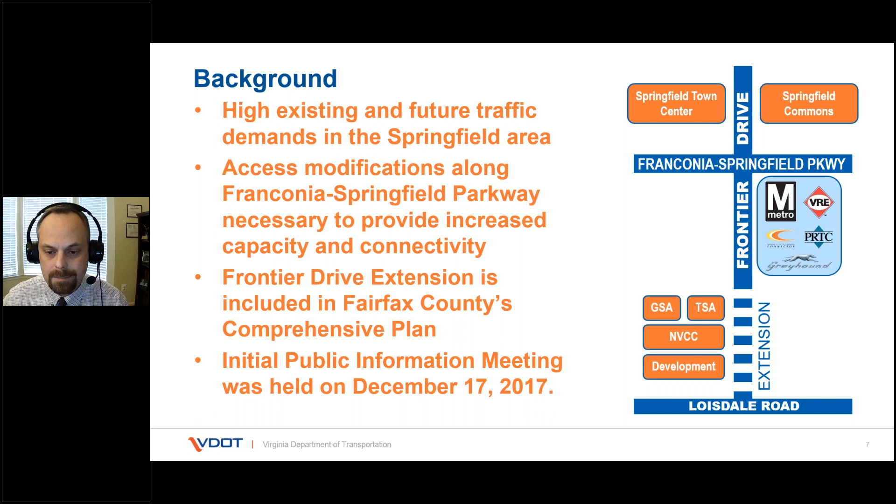We did have an initial public information meeting back in December of 2017, and since then there have been some changes to the design based on input from Fairfax County as well as WMATA, and we'll be discussing those changes in a moment. Next slide, please.

This next slide shows the project location and area in its entirety. This includes the extension to the south to Loisdale Road, the introduction of braided ramps to the north at the interchange with the Franconia-Springfield Parkway, and the circulation area around the metro station.

These proposed improvements are intended to enhance traffic operations and safety by providing increased capacity and greater connectivity, provide improved accessibility to the Franconia-Springfield Metro station and businesses located along Springfield Center Drive, and also improve pedestrian and bicycle facilities throughout the corridor, as well as reduce congestion levels on regional roadways.

Next, to talk about the specifics of the project, Robert Morris, our consultant project manager, is going to walk you through design. Robert?

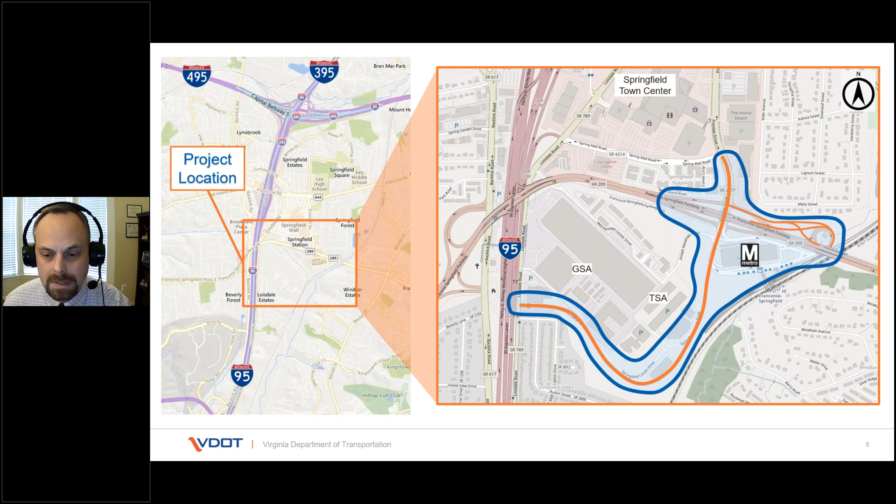Thanks, Andy. Next slide, please. As you've heard, there have been some changes that have occurred since our last public information meeting was held in December of 2017. There's been a great deal of coordination between VDOT, Fairfax County, WMATA, and adjacent property owners.

Let's briefly review the design features for this project, and I'll then highlight those areas where things have changed or been updated. In general, the project can be summarized by looking at three main areas of improvements.

These are the extension of Frontier Drive from the Franconia-Springfield Parkway interchange and the metro station across Long Branch up to Loisdale Road. Frontier Drive will replace Springfield Center Drive for the portion of the project that we call the South Project area.

We will be modifying the Franconia-Springfield Parkway interchange into a braided ramp configuration to provide operational and safety improvements, as well as access improvements at and around the metro station.

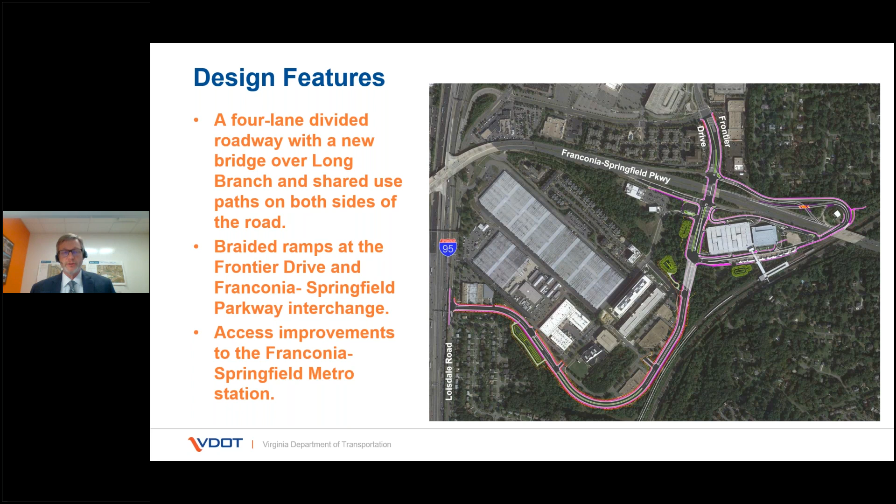Let's now focus on some specific areas of the project, and I'll highlight some of the changes since we last got together in 2017. Next slide, please.

This slide shows the typical section that was presented previously. It included on-road bike lanes, a sidewalk, shared use path, and an overall width of 106 feet.

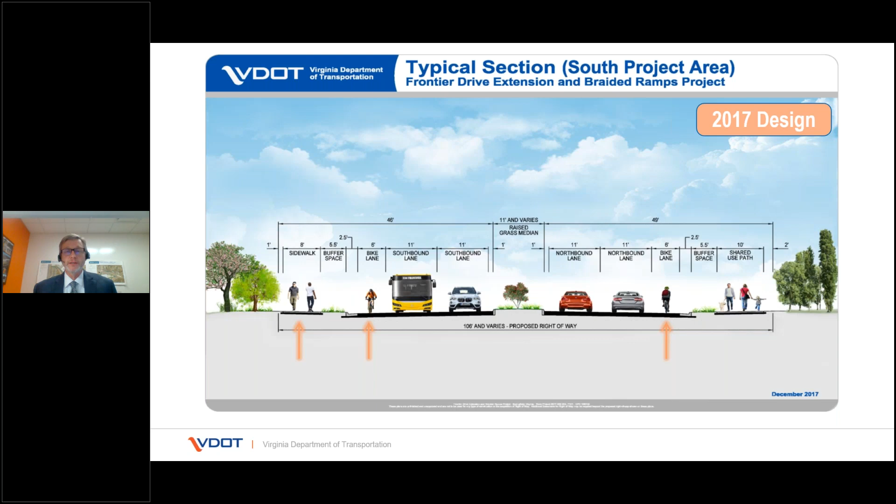This slide shows the current typical section. The overall width has been reduced to 98 feet. The on-road bike lanes have been removed, and Frontier Drive will now include a 10-foot shared use path on the southern side and a 10-foot concrete urban shared use path on the north side.

The on-road bike lanes were removed due to the complex interaction of vehicles and numerous traffic movements near the interchange and the metro station. For the purposes of consistency, the south section will not include on-road bike lanes either. Next slide.

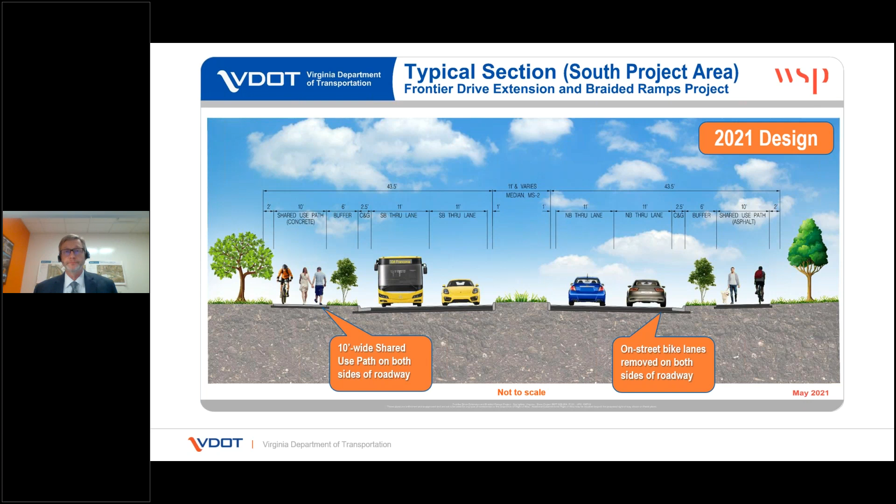This slide shows the North Project area, which includes the braided ramps, the metro station, and a portion of the Frontier Drive extension. The circles identify some of the more significant design features that have changed.

These include the typical section changes I mentioned, the intersection configuration at the entrance to the metro station, the configuration of the bus layover lot, and the proposed roundabout on the east end of the station. Next slide.

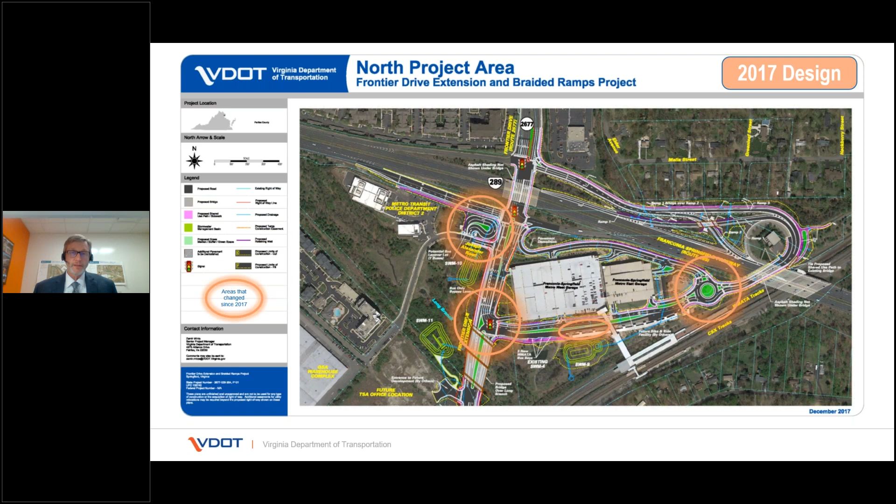As a result of continued coordination with WMATA and the completion of a value engineering study on the project in 2018, revisions were made to the 2017 concept and are shown on this slide.

As previously mentioned, the on-road bike lanes were removed due to the complex traffic movements in this area. The bus layover configuration has been revised to improve bus operations, both entering and exiting the lot. The intersection at the entrance to the metro station was modified to a jug handle configuration.

This will allow vehicles and buses coming from Franconia-Springfield Parkway that want to enter the metro station to stay to the right, which improves operations along Frontier Drive and eliminates the majority of the weaving movements that were present in the 2017 design.

And lastly, the roundabout planned on the east end in 2017 has been eliminated in favor of a signalized intersection. This change was a result of coordination with WMATA, considering the planned circulation at the station and future plans for facilities around this area.

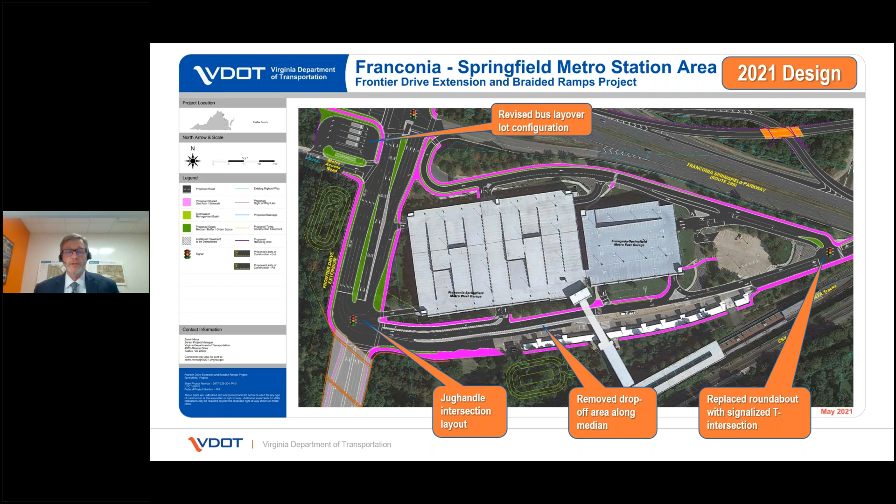Next slide, please. This slide just provides a zoomed in view of the area around the metro station, which includes the updated bus layover lot configuration, the jug handle intersection configuration, elimination of the roundabout, as well as some changes in circulation around the station. Next slide.

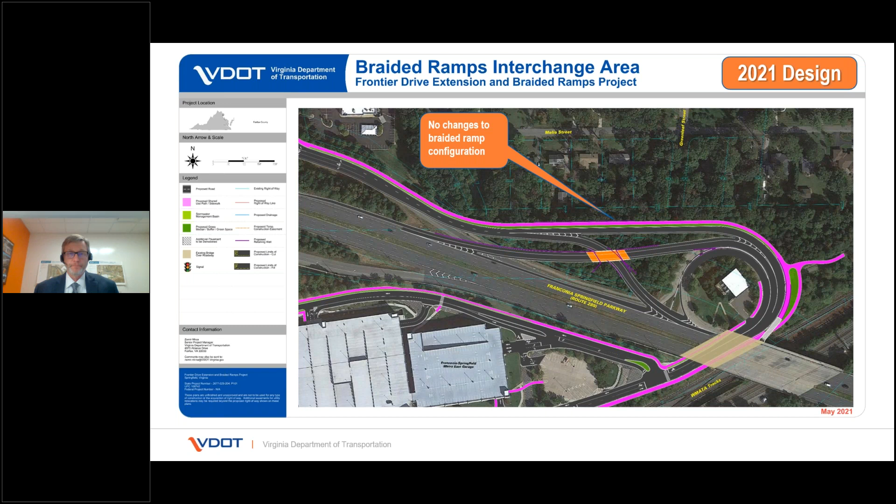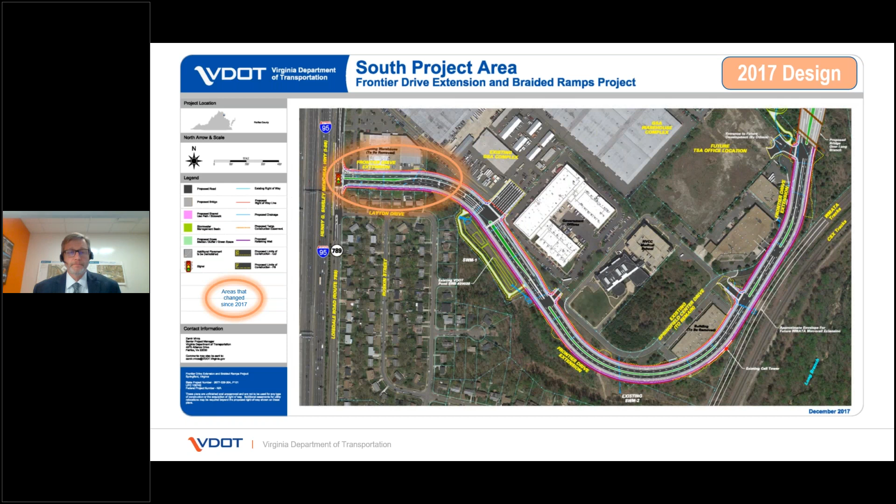For the updated 2021 design, the typical section revision reduced the footprint of Frontier Drive, in particular at the intersection with Loisdale Road. This made it possible to eliminate the impacts to the building on the corner of Frontier and Loisdale. Through the reduction of that typical section and a retrofit of the existing stormwater management ponds shown on the screen, the project was able to reduce the impact on adjacent parcels along Frontier Drive.

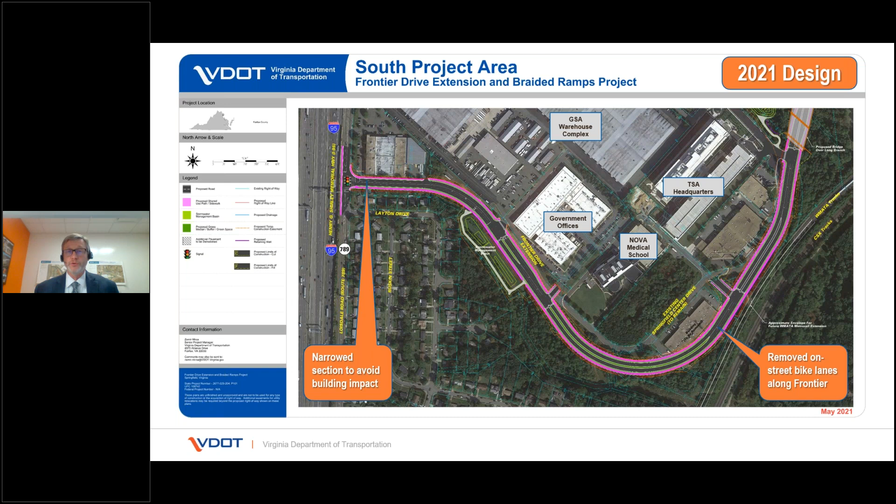You'll also see that access points along Frontier have been updated to provide access to the existing properties, as well as to adjust for the arrival of the future TSA headquarters.

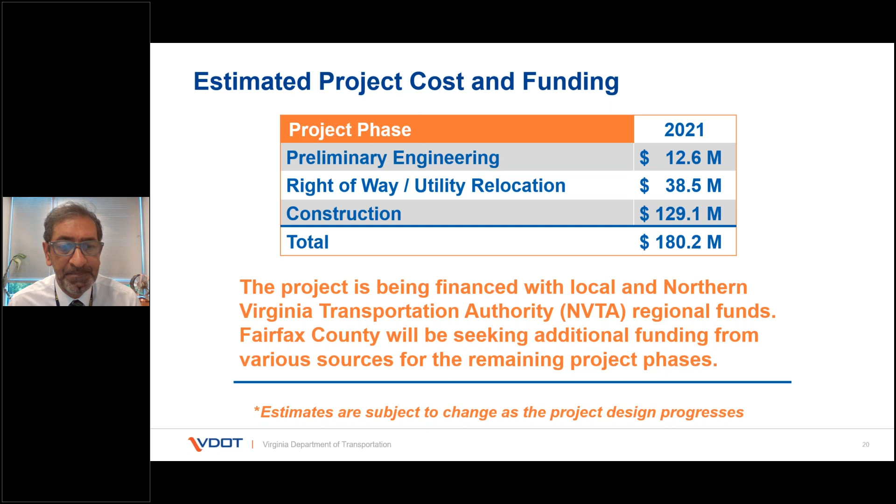With regards to funding, the project is being financed with local and Northern Virginia Transportation Authority, NVTA, regional funds. Fairfax County will be seeking additional funds from various sources for the remaining project phases.

Following that, we will seek endorsement from the county as well as design approval from the VDOT chief engineer, and we expect to have that by winter this year. After which, we'll begin work on the detailed design plans.

The next phase of the project will be the right-of-way and utility relocation stage. This is when we acquire the necessary rights-of-way for the affected property owners along the corridor, and also when we protect and, if necessary, relocate the utilities that are affected by the design. The process is usually quite lengthy and is expected to take several years.

So for now, we expect to begin construction by the summer of 2025. But again, that is subject to change. So as I mentioned, the next step is to develop the public hearing plans by the summer

and then hold a public hearing in the fall. But we will continue our coordination efforts with WMATA, Fairfax County, and the other affected project stakeholders. I should mention here that we may hold a joint public hearing with WMATA since they are required to hold a public involvement meeting themselves.

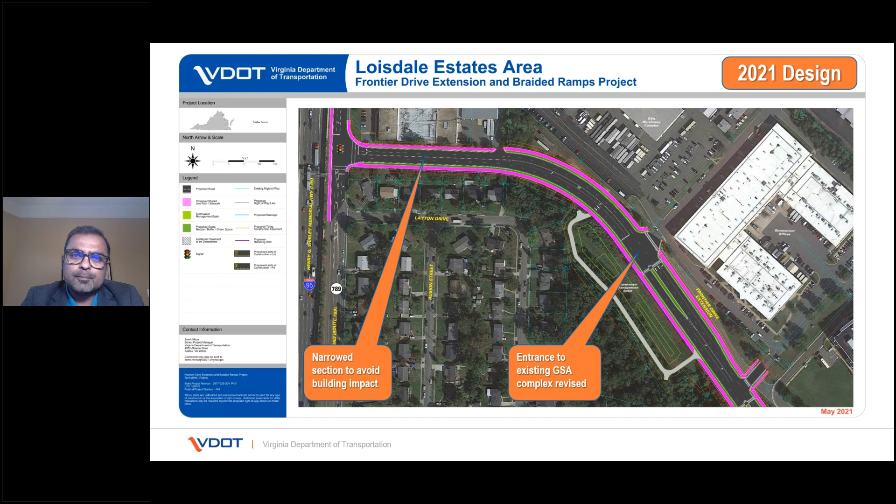Yeah, I think the signal at Loisdale has recently been rebuilt, and if you're familiar with that area, you might have noticed that. But once this project begins, we are upgrading that signal again to accommodate the design that we are proposing.

So what we do in the noise study analysis is place receptors at each outdoor use of a noise sensitive site, like a residential home. Once we do the noise study, if the noise levels exceed the noise impact criteria, that site is considered impacted, and we are required to evaluate a wall. Once the evaluation shows the wall provides at least 5 decibels of noise reduction to the impacted sites, we call that benefited.

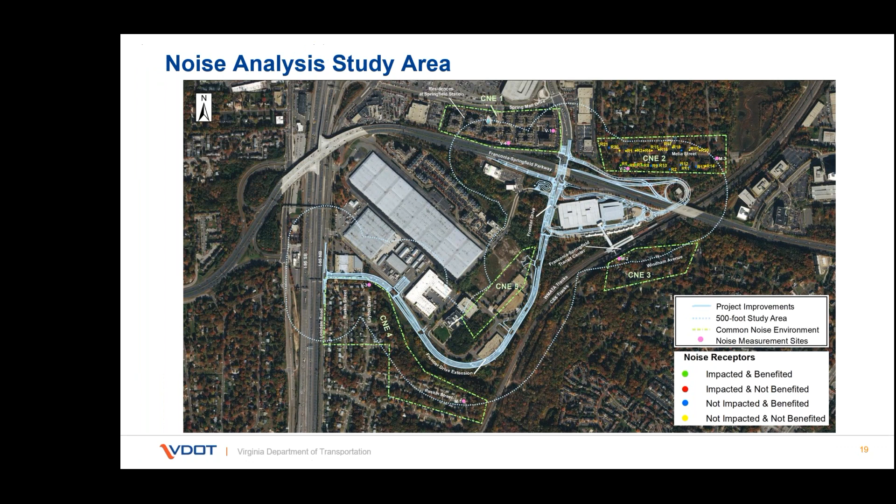Yeah, sure. So we have about 500 vehicles in the morning coming from the station side. Out of that, 450 vehicles will be turning right onto the TSA driveway, and the remaining 50 vehicles will continue towards Loisdale.

Even that traffic wouldn't necessarily go all the way to Loisdale, right? It could be going to the NOVA Medical School, or it could be going to the GSA facility, and there's other businesses down there, right?

That's correct. So overall at Loisdale, sorry, on Springfield Center Drive, the trips coming out of Springfield Center Drive going onto Loisdale, we are looking at 50 vehicles in 1 hour, which is the peak hour in the morning, and about 250 vehicles in the PM peak hour in the evening. We do have a separate left turn and right turn lane on Springfield Center Drive, so with the signal and these separate turn lanes, it should accommodate the projected amount of trips that we have analyzed.

All right, thank you, Harry. We have another one for you as well. This one is from Jim. Sorry, it looks like we skipped this question earlier, so I apologize for that. Reiterating this question that did not get answered: of the projected 6,000 to 7,000 estimate of cars per day on the extended road, how many of those cars are estimated to be going to Loisdale Road, and what proportion of that will be northbound?

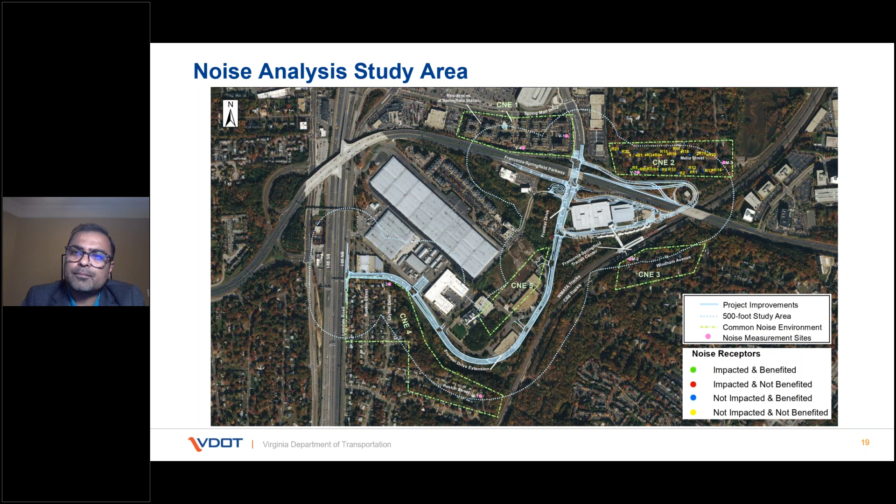Thank you, Harry. All right, so the next question we have is from Alexis. Are improvements planned for access to the path that starts at the southwest corner of Frontier Drive / Franconia-Springfield Parkway and is adjacent to the Metro Police property? Right now, there is no signage, no lighting, and the vegetation is always overgrown. The path's asphalt condition is very poor. It is not clear that a path is available there. It's a confusing and uncomfortable experience for people walking and biking.

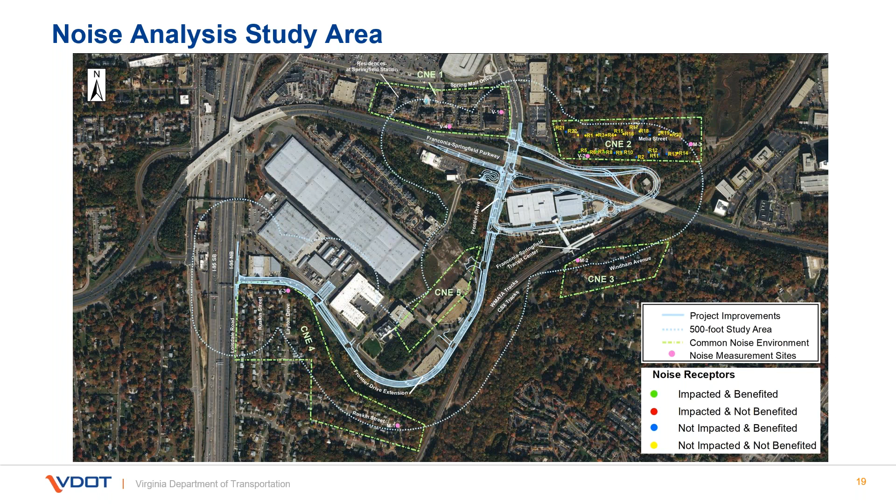If we could just go to that slide that shows the overflow parking lot, and Robert, maybe you can speak to what's going on there and how far away that Metro Police property is in relation to that, and show it on this plan. Maybe zoom in if you can.

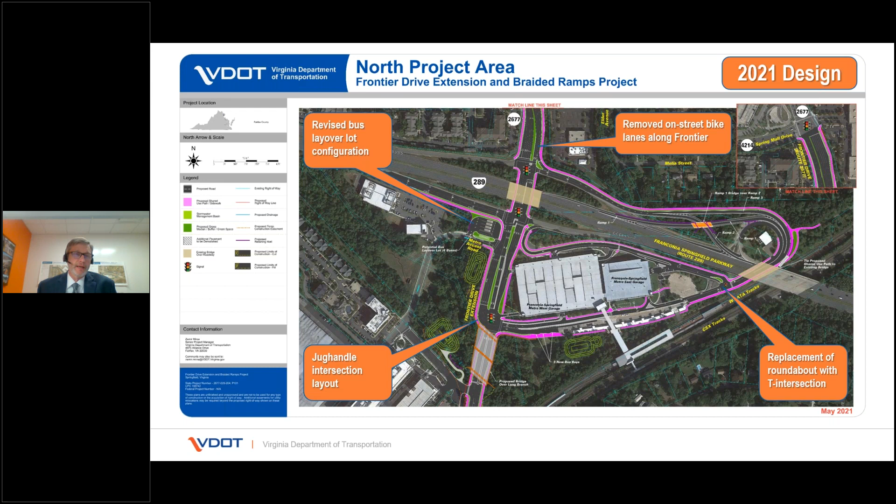Sure. Genevieve, did you say, just to make sure I got the path location correct, which part of the interchange? You said southwest part of the interchange? Yes, it says the path that starts at the southwest corner of Frontier Drive / Franconia-Springfield Parkway and is adjacent to the Metro Police property.

Okay. If you look on this screen, you'll see it's kind of a magenta color. They identify the new sidewalk or shared use path connections that we're going to be making as part of this project. As part of the work related to the off-ramp coming from Franconia-Springfield Parkway down to Frontier, you can see on the screen right now that we are showing connections from that path that you're referring to. So at least along the length of that ramp, we're going to be calling for replacing that asphalt path that runs between the ramp and the Metro Police Station. And as you can also see on the screen, there's lots of other connections that are going to be tying in, both to get over to the Metro Station as well as to head up Frontier Drive, heading north, heading up towards Springfield Town Center.

So a portion of it will be certainly improved, and there'll be a little bit of realignment of it. I don't know that it will extend quite as far as perhaps the question was asking, but certainly we're addressing it within the project limits.

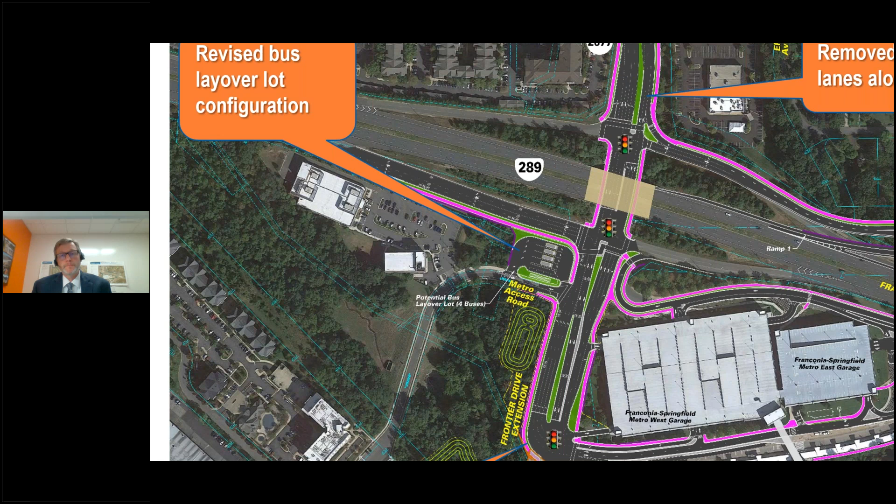All right, thank you. The next question is from Graham.

Much of the extension follows the existing Springfield Center Drive alignment with a few exceptions, such as the area of the undeveloped parcel adjacent to the NVCC building. Will those sections of that existing right-of-way be closed?

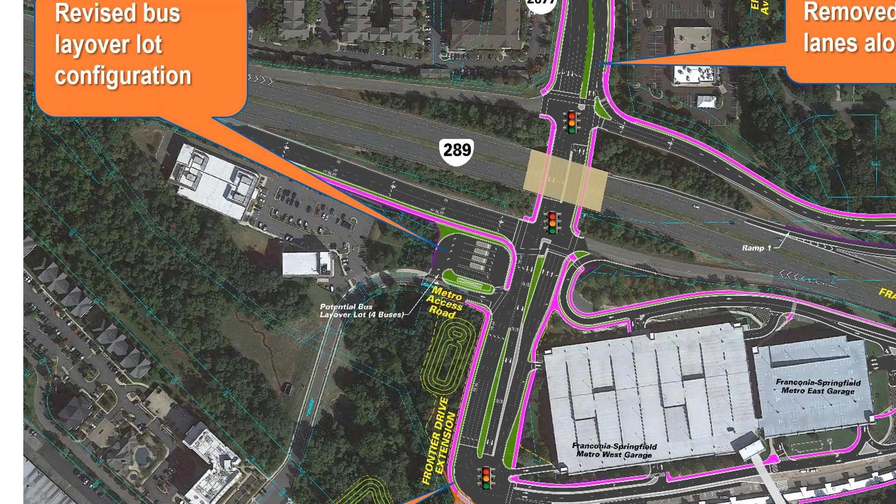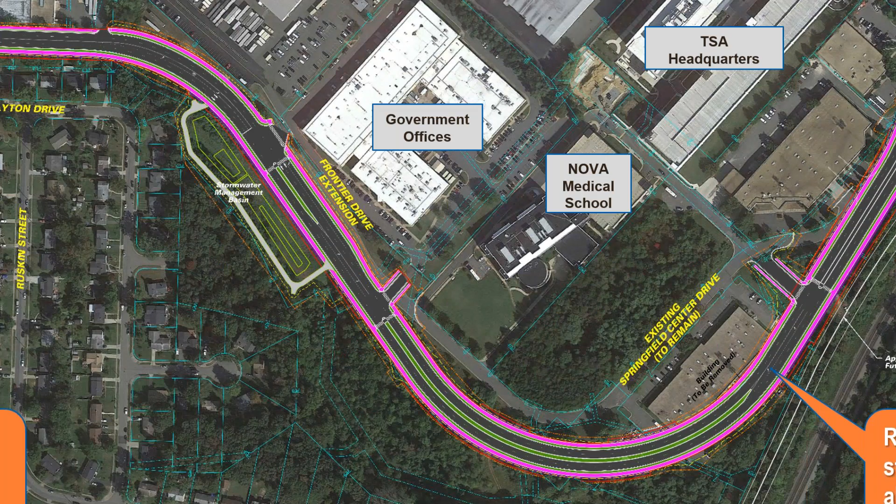So if we can just go to that slide that shows that location, maybe zoom in a little bit in that area, if you can, and where it turns. So that property being referred to is that sort of wooded parcel right next to the Nova Medical School.

And that is owned by Nova. I think it was mentioned earlier that there are plans to develop that by the Nova Medical School.

So, as you can see, we are providing access to the Nova Medical School as well as government offices adjacent to it. We are currently revisiting the access to this, and this is just a preliminary design showing the access point. There will be another access point further to the north that you can see. We are providing that access point as well.

The road actually does impact this property that is planned to be demolished, and we've already met with the property owner and come to an agreement over that building. Obviously, we haven't reached settlement on the compensation that will be paid, but they're aware that their building will be affected by the project.

So just beyond that, you'll see that we have provided access to both the Nova Medical School and the TSA headquarters through that access point.

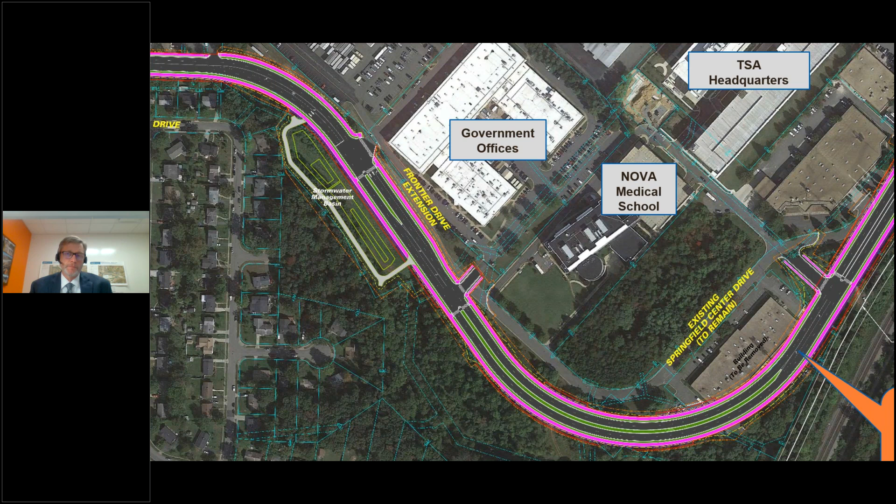All right, thank you both. Our next question is from Linda.

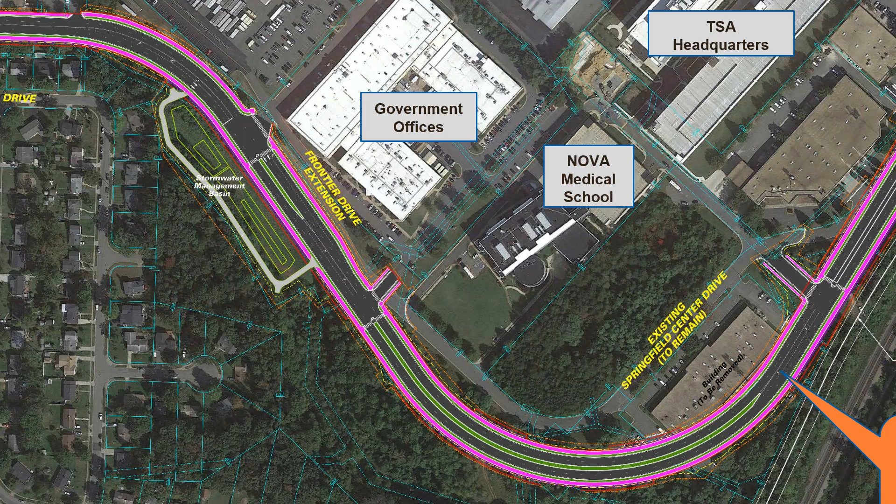Are we to understand that there will be no direct cut-through, vehicle or pedestrian, into or out of Springfield Forest? In parentheses it says Melia Street, Elder Avenue, and/or Hackberry Street. So I'm assuming this is referring to the area north of the proposed braided ramps, correct? It's sometimes difficult to follow that location.

Right, so whatever access points, Robert, I don't know if you know whether we're cutting off any access points. To my knowledge, what we are doing is enhancing some of the connections with our design to the existing trails at that location.

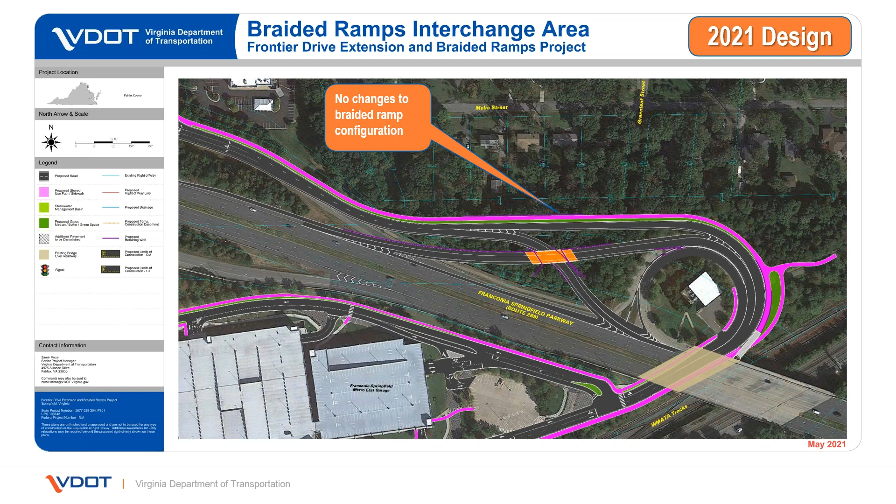As we look to the right of that slide, if you zoom in on there, that is where we are making a connection. I'm not aware of any other locations that we are impacting adversely.

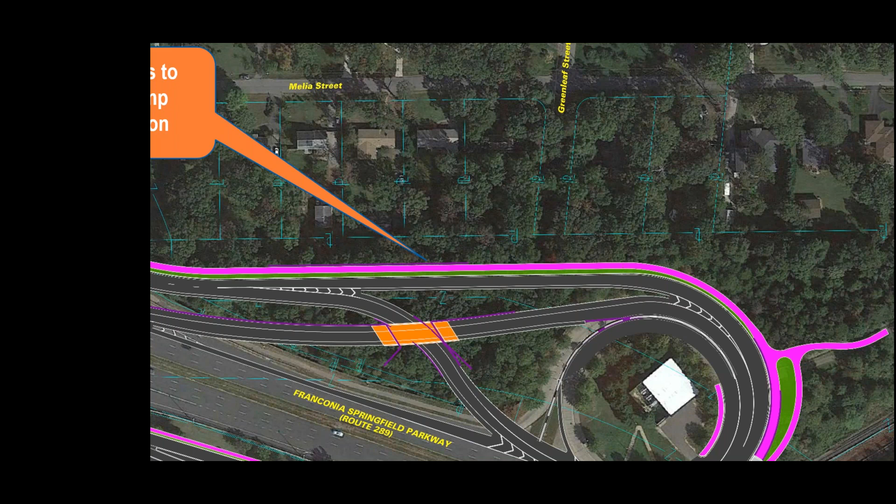Correct. Yeah, there is no vehicular access being made to Melia Street or that neighborhood up there from the braided ramps. There is, as you can see in the lower right corner of the screen, a connection to the existing trail down there, tying in to the shared use path that'll run along the braided ramps, but that would be it.

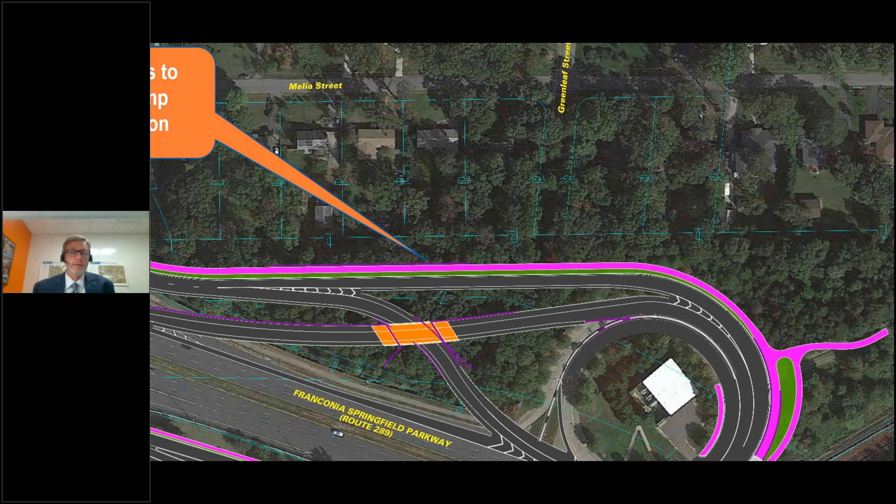And just to mention, this is where the wall will go in between the braided ramps and the properties at this location, if the wall is justified and warranted through the detailed noise study. Again, it's for everybody else's benefit as well.

Okay, thank you. Our next question is from Willie, and Willie asks: the Loisdale end of Springfield Center Drive is barely 3 lanes wide. Are you widening that?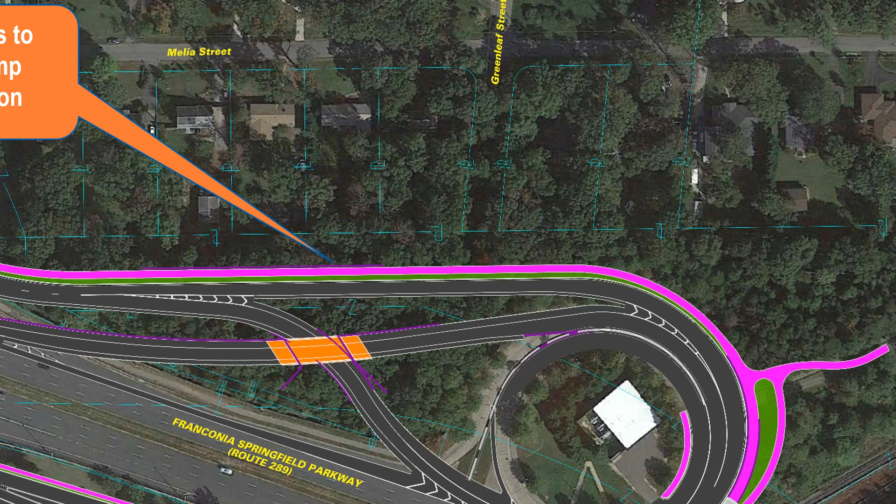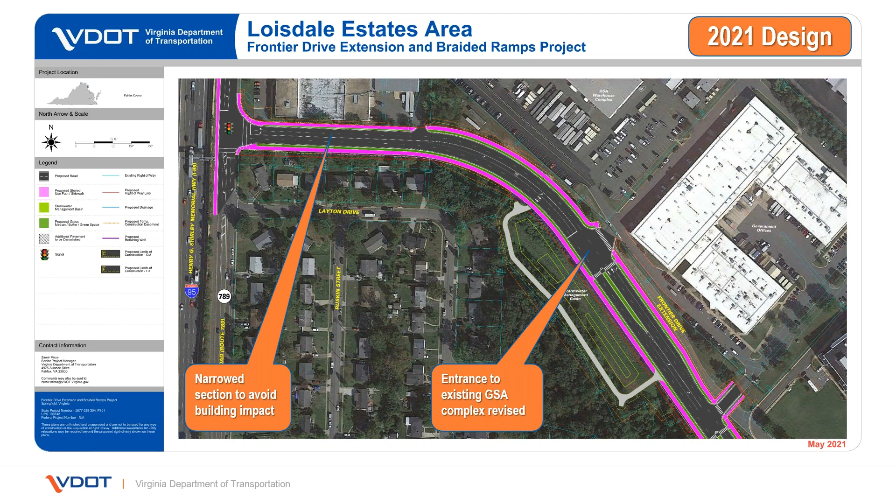So Frontier Drive at the Loisdale end will be widened to 4 lanes. And as was mentioned earlier, we are narrowing the section in order to not impact especially that big building on the slide that you see. We have been in contact with the property owner, or the tenants of that building, and this was the resolution. But for the purposes of the widening, there will be 4 lanes of traffic as opposed to the current 2 at that location.

Yeah, and I would just add that other sections of Frontier Drive have a median. An effort was made at the intersection here to eliminate that median. You can see on the right of the screen there is a turn lane for the next intersection. However, we have eliminated the median through here in an effort to narrow the section and minimize impacts to the greatest extent possible.

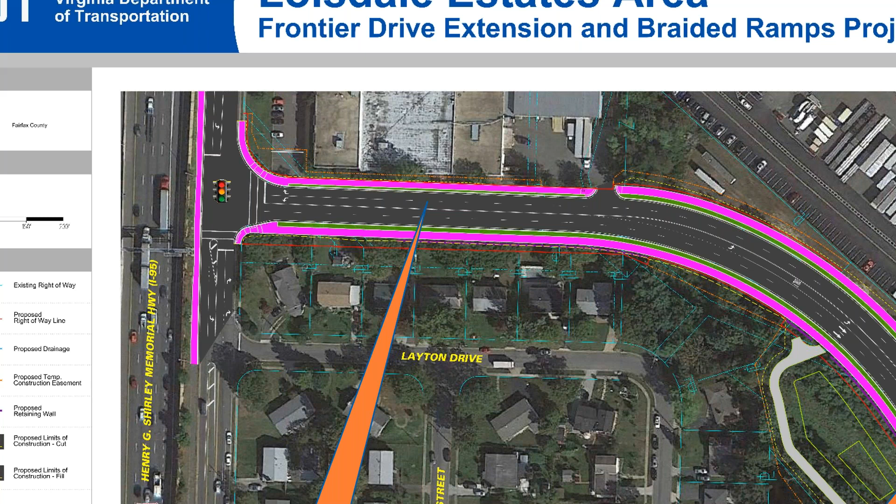John asks: will you be demolishing the Evangelist Church near the NVCC campus? If it's in the building we are demolishing, then yes. There are several businesses that occupy that building. If you zoom in on this slide where the road turns, that's the only building we are impacting along the alignment. If the church is within that building, then yes, it will be affected. But we have been in touch with the property owners and made them aware of the project impacts, and we've had extensive meetings with them so they could maintain some of their property for future development.

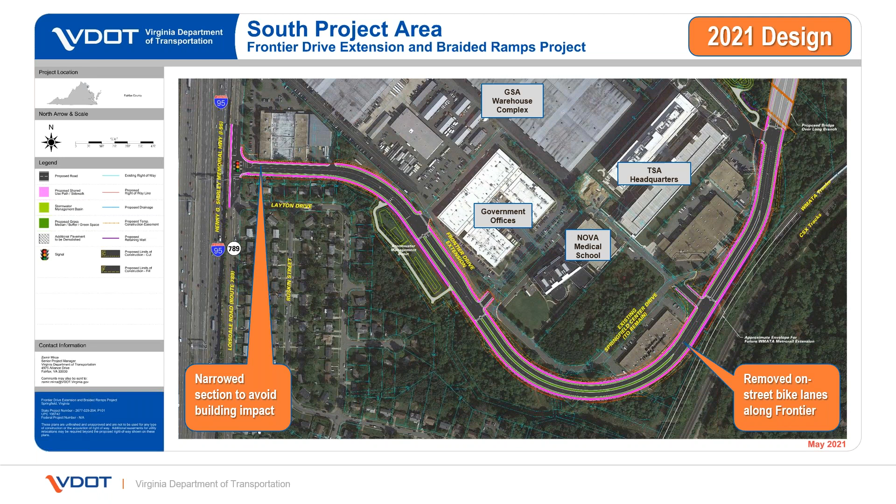Yes, I am still on, observing it all. I do appreciate having this opportunity at this point in the design as you move forward to the fall public hearings to continue. I appreciate particularly you highlighting the Loisdale light functioning, as well as the path question. I appreciate that action now as we look at a project that is probably at least 4 years away. Again, thank you very much for this information.